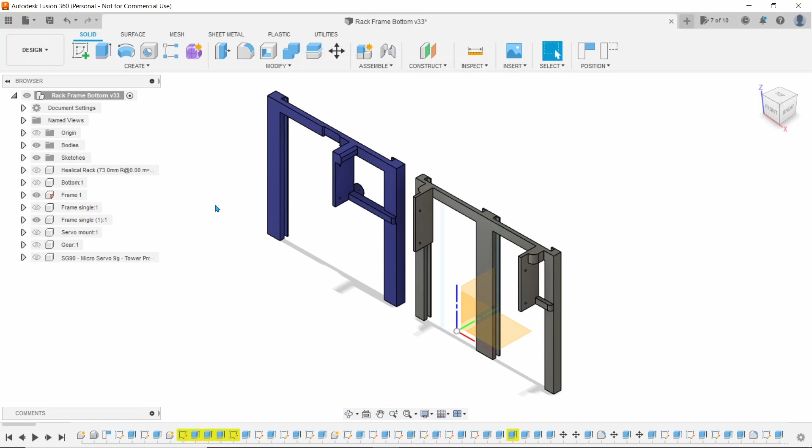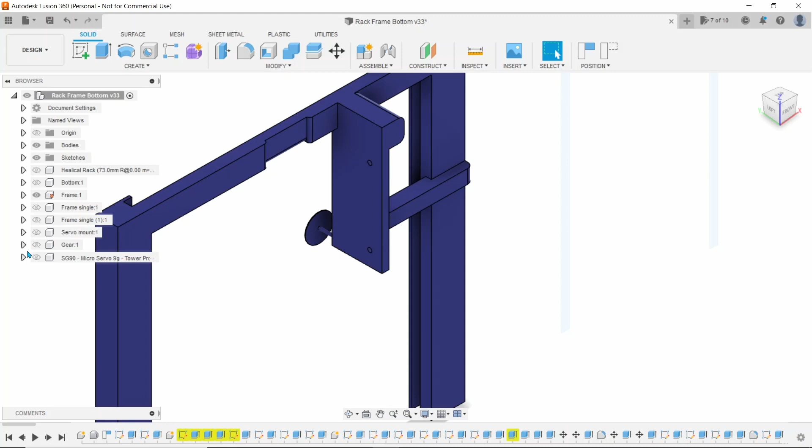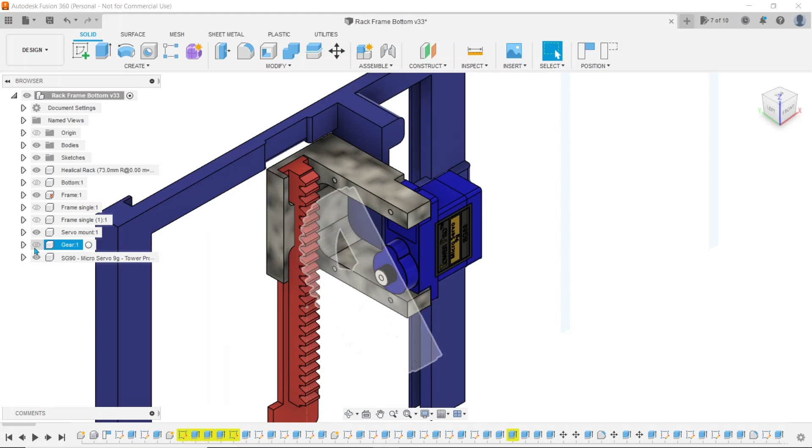You can use your trees as well on your slicer, but I just designed it in there. So I'll also put in the servo mount. And technically speaking, I could put the servo mount on the same print as well. I put in the helical gear, the rack. I also use a little servo I downloaded from the internet as well, just to aid the design piece, and also the gear. If I was clever enough, I'd be able to animate this on Fusion 360, but still a trial and error situation for me just now.

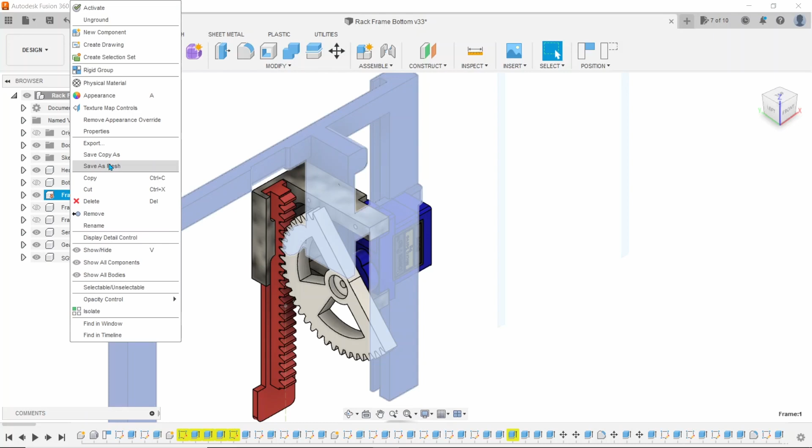So once you've got your design there, you click on the part you want, frame for example. Save it as a mesh, and then you can export it to your slicer, which I'm using Cura 5 at the moment. So that's a double door printed. I'll take it off the bed, print the rest of them. I'll take you over to the workbench and show you how I assemble it.

Well, that's all the components here, folks. I've got the frame just printed off there. I've got the rack, and I've got the gear as well. I've got a little servo mount, and I've got the end of the rack. And I've got two sheets of 1mm styrene I'm going to glue together to make the door. I've also got two types of gears here. One's been done with resin and one's been done with a filament printer. You can print the whole lot in filament or resin the way I've set it up.

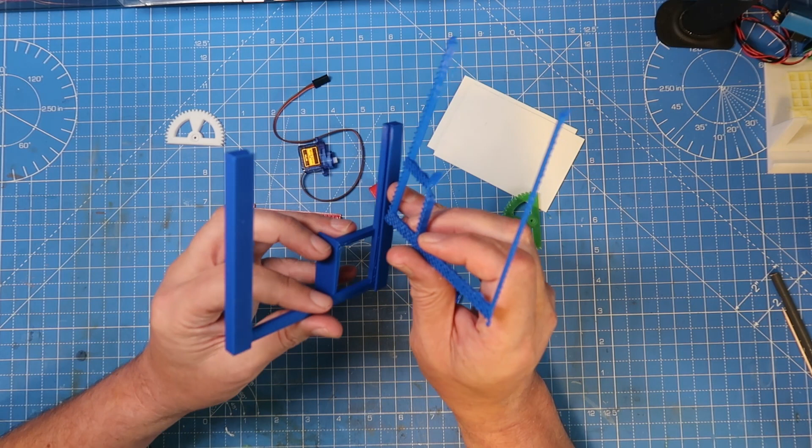So with the print, I'm now using Cura 5. And it's got this tree effect there, and it's a real pleasure to take off the supports. Now, in the past it was a pain in the butt to say the least. So it comes off very easily. A little tidy with a file.

So I've got the frame, I've got the servo mount as well. I've designed the little holes to line up with them as they go in. And for them, I'm using 9mm by 2.2mm panhead screws. Screw it all the way in, just to get a thread started, and take it back out. So that's the servo mount in.

I'm going to put the servo on using the screws that came with the servos. It's a SG90 Tower Pro. It really doesn't matter what way the servo goes, up or down. It makes no difference whatsoever. So that's the servo onto the door frame servo mount.

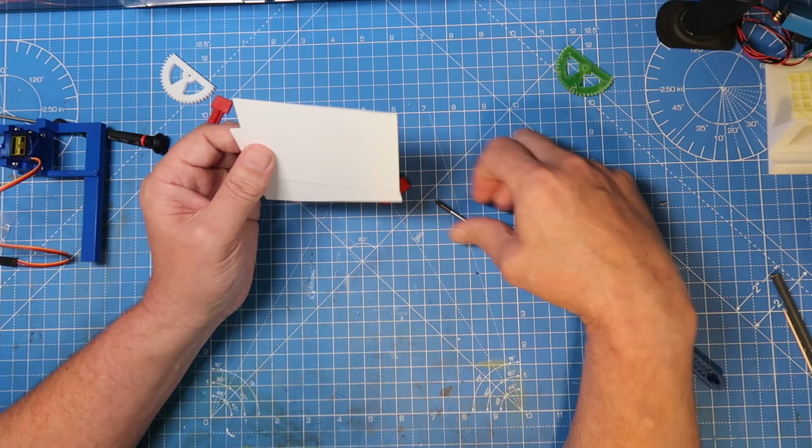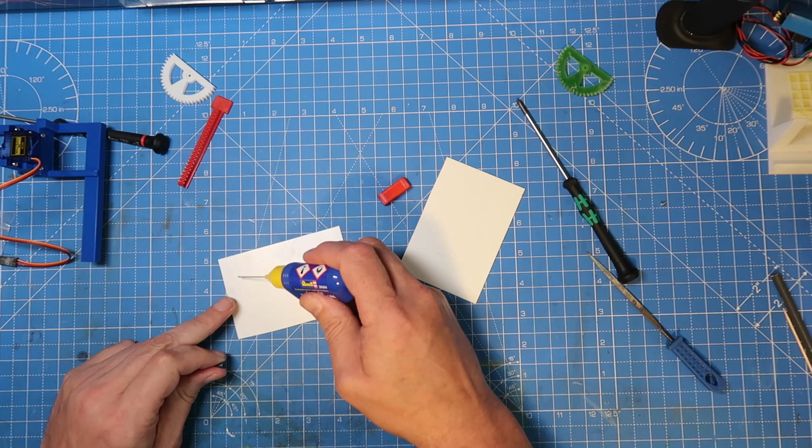For the doors, I use a bit of plasticard, 70mm high, 105mm wide. I'm just going to use a bit of glue to stick them together. For these ones here, I'm just going to use a bit of plastic glue. Now, you can get a bit of Scotch-Brite, give it a little rough up, and then you can paint it before you put it on. The same with the frame as well. You can pre-paint the frame if you want. Depends what colour of filament you use.

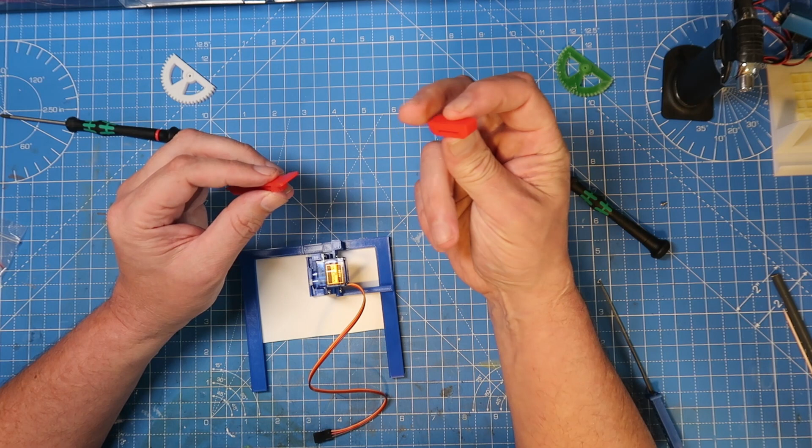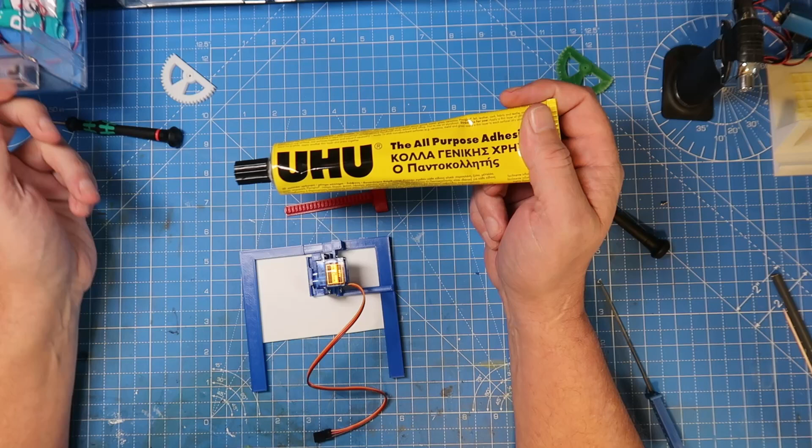So with the rack, I've got this little pipe here, a little spacer. It slides in there. You can, if you want, glue that as well. The glue I use for that is a UHU all-purpose adhesive. You want to get it down as low as possible. Give yourself as much travel as you need. Just double check, make sure it goes up and down. So as we say, we'll let the glue dry for a couple of hours and we'll come back to it. So I'll put the spline in.

So I'll put the gear in there, I'll attach it to this little servo tester. The only issue with this type of servo tester is it doesn't do 180 degrees, it only does 90 degrees. You can make your own servo testers that will do 180 degrees, or you can buy them as well. So just a little test, I'll power it up and see it working. As I say, I won't go through the full range of movement.

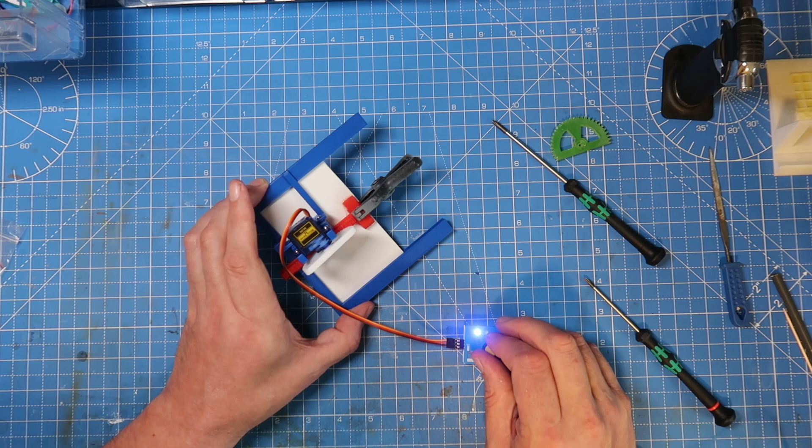So that's the door ready to get fitted onto the model. For gluing the door onto the model, same again, I use a UHU glue just to fix it to the model. And that's you got your working door using a rack and pinion system.

On my layout I use the DCC Next for my servo controls. I can actually power quite a lot of servos off this one module. And indeed the engine shed has got 6 servos running off the module. And I use a separate 5-volt bus and just put the signal wire into the decoder. So I've got plenty of videos on the DCC Next if you want to have a look how you set the servo up on the DCC Next. With the DCC Next as well, I made up a little frame using Fusion 360, it just sits in the little cradle between the beams.

Well, there you are folks, I hope you enjoyed it. I've been asked 2 or 3 times, do I sell them? The answer is, don't know. I don't know how much I would sell them for, I don't know if it'd be worth my while going into a little production, but hey.